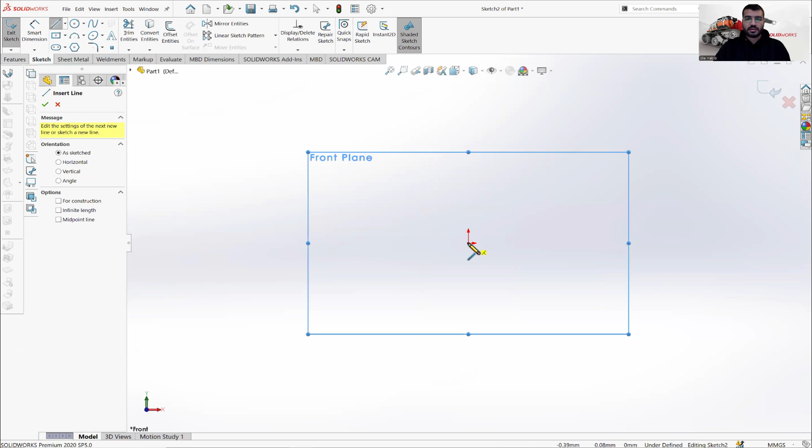So here, front plane normal to, another time normal to, then sketch, line. Let's start by drawing a random sketch, and after we will define it. Here we have an arc.

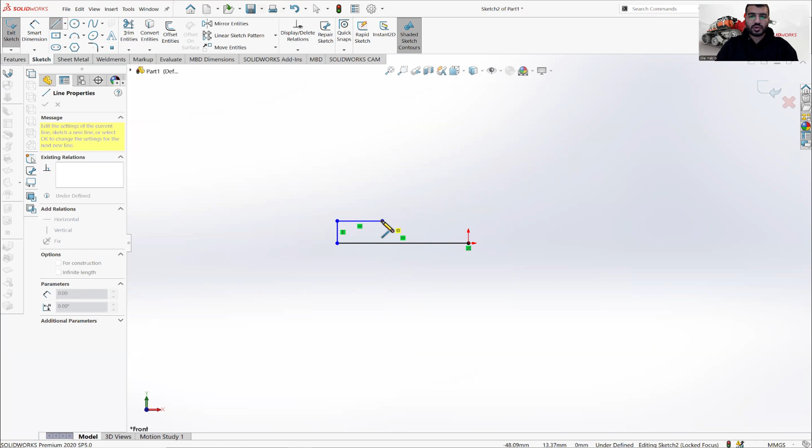What to do? Line another time, return it to the point. Then another line like this, vertical. Then we have right and bottom, horizontal and bottom here. Then horizontal. Then here we have a vertical line.

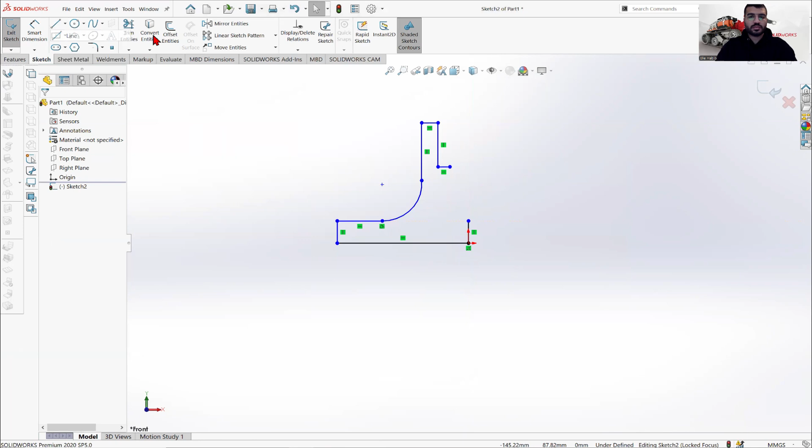After it, we have an arc here. What to do? Line another time. We have the arc there. So we have a full contour sketch. Now let's define it by putting the dimensions.

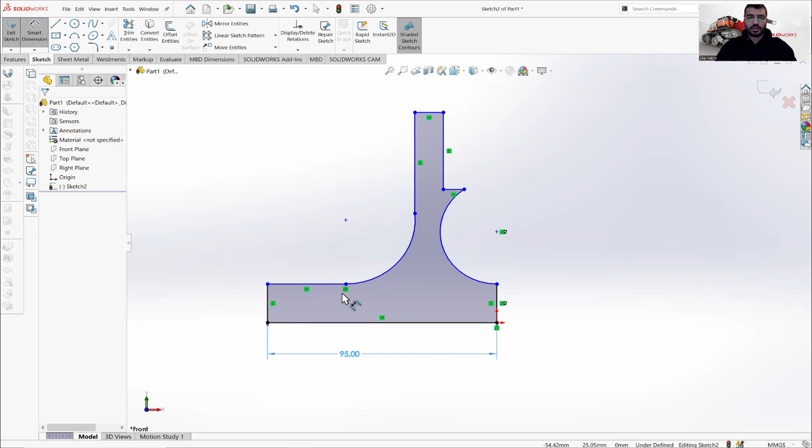We have here length of 95. We have here 15. And here these two lines control this line are equal. We have the total height is about 85 millimeter, as mentioned there, 85.

Here we have radius 30. Here also we have radius 30. Here we have 5 millimeter. Here is 5. And this line is 15 millimeter.

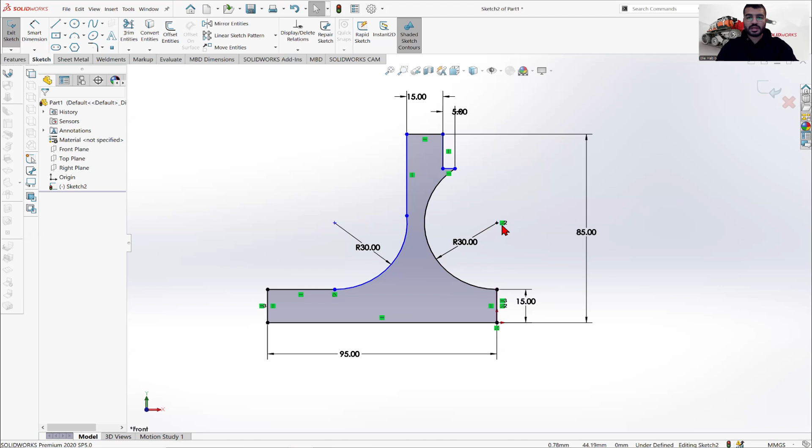So here, the center of the circle control this line coincident. So let's do an undo. Drag it. This line control the center are coincident. And here, this line control this arc tangent.

Perfect. Now let's extrude it. Or before we have this cut there. Let's draw a rectangle here. That we see here, the cut is about 3 by 15.

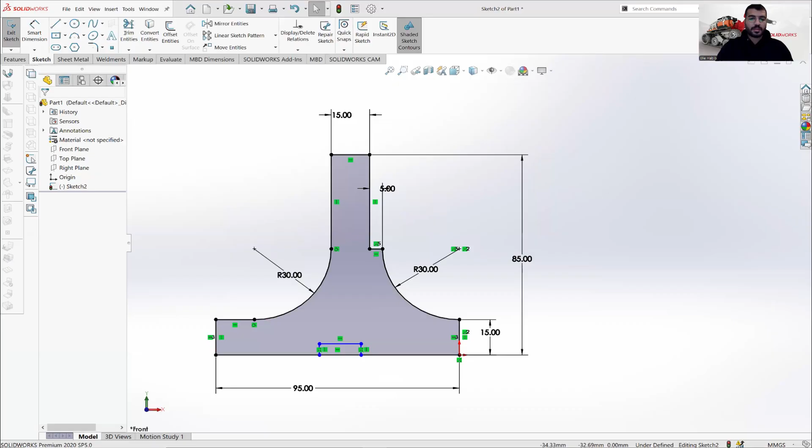Here, 15. Here, the length is 40 millimeter. This line to this line, it's 40. Yes, trim. Okay.

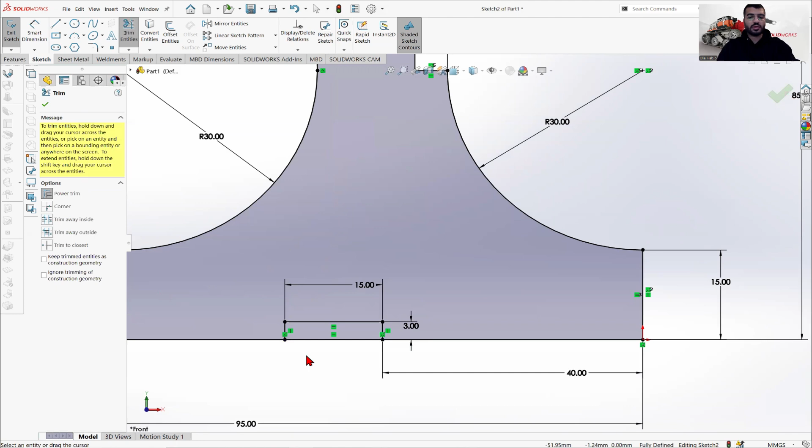Now we have this sketch fully defined as drawn there, also with all the dimensions. Now we should extrude it 40 millimeter. What to do? Feature, extrude. Type here 40 millimeter and click on yes.

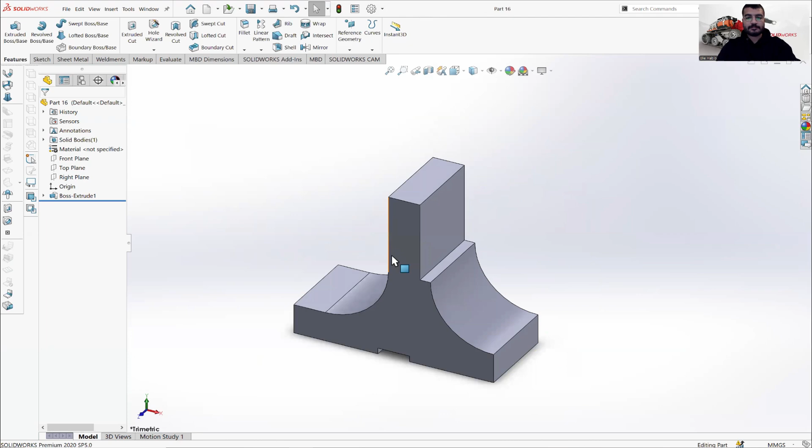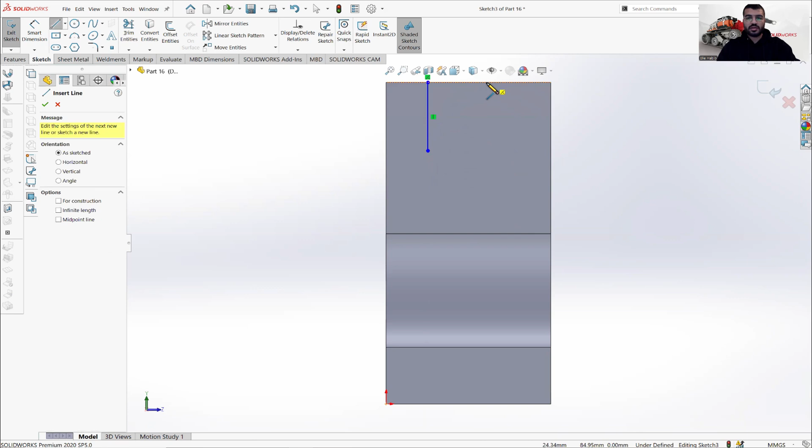Now let's do the cut there. Right click, normal to, sketch this line. We have a vertical line within an arc circle. So it's better to draw the other line also vertical. Then do the arc here.

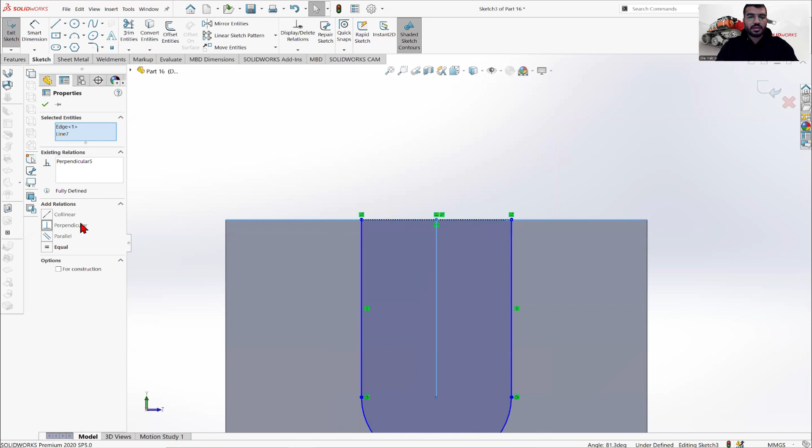Then draw the line there. The center here, to the center. This is the center, and make them vertical in order to make the sketch in the mid of the surface. So here, line, control this line, perpendicular, and it's just for construction. So mention it for construction. And now we have it in the middle.

We have a length here of 25 millimeter. Here we have a diameter of 10, radius 5. So here we have radius 5. Perfect. We have here it's 15 by 15.

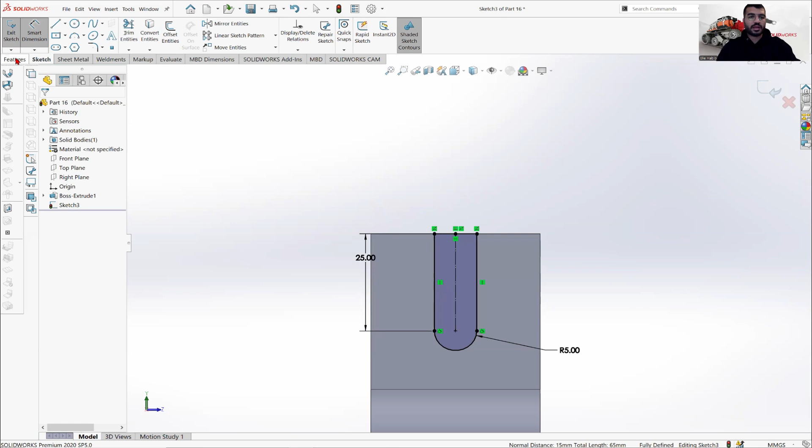We can check it if it's 15. Perfect. Here also it should be 15, because it's in the middle. And we can do the cut, feature extrude cut, and click on yes. Click on save.

Finally, we will draw this circle here. Half circle with these two tangent, with an extrude up to surface till this surface. And you should draw the sketch here on this surface there. And we have the dimensions here in the top view. This is the side view, this is the front view, and this is the section view.

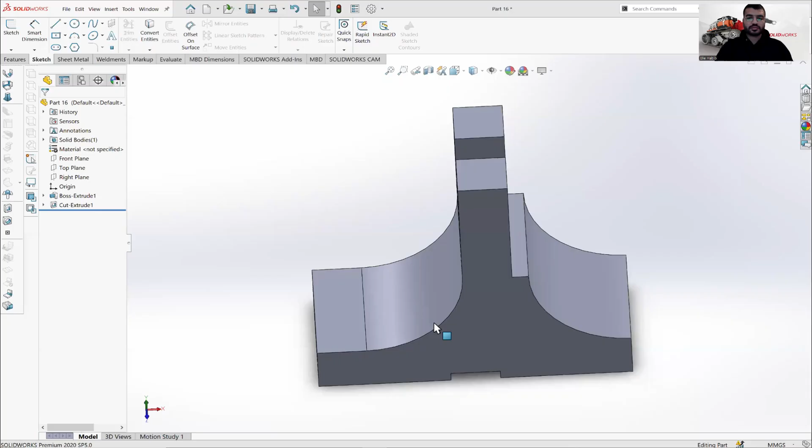And after finishing, we have here a hole of diameter 10 millimeter. We will cut it through all as mentioned there and as mentioned there. So first of all, let's draw with this sketch here. Normal to, perfect. Have now this view.

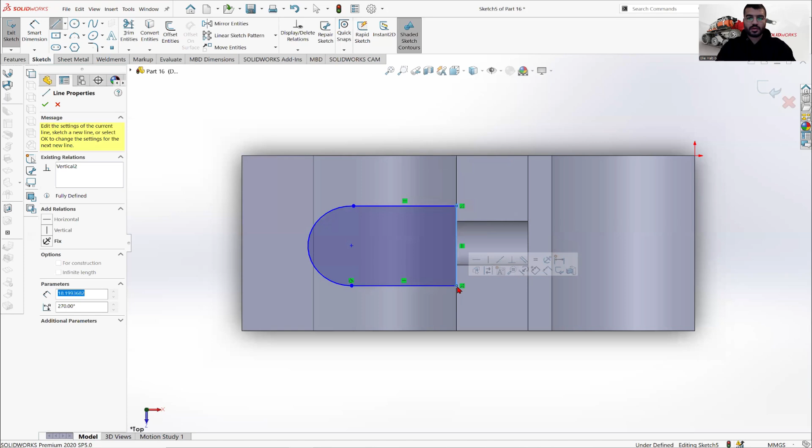Let's draw the first line. Half circle. Okay, it's in the middle. So here, midpoint, and here, perpendicular. Here for construction. Here we have 15.

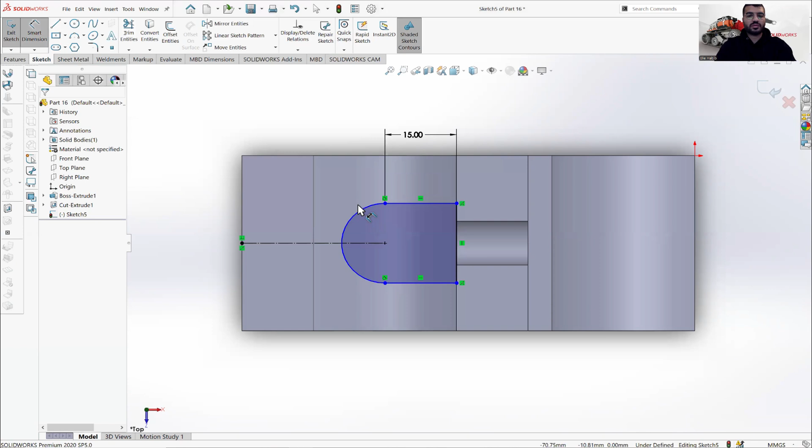Okay, so here we should do add relation, control this arc control this line, and add tangent. Perfect. And here we have 15. So here we have a diameter of 12.5 times 2 because it's radius 12.5. So radius 12.5.

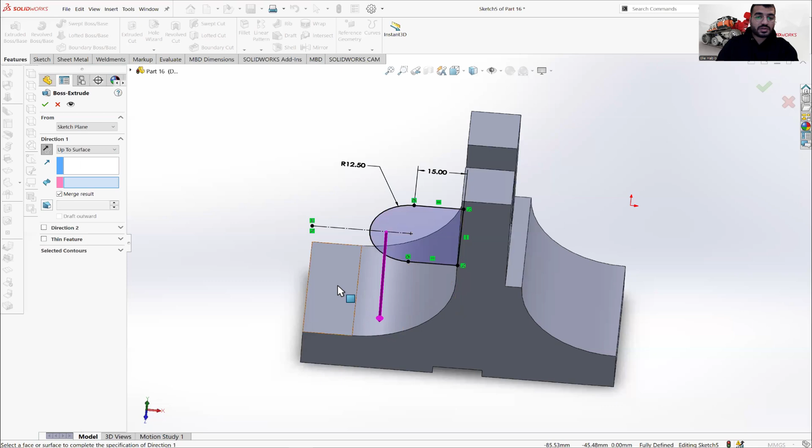Okay, and now we should do the extrude up to this surface there, change direction, and choose here up to surface, to this surface, click on yes. Click on save. Finally, we should do the cut here of diameter 10 millimeter in the center of the arc.

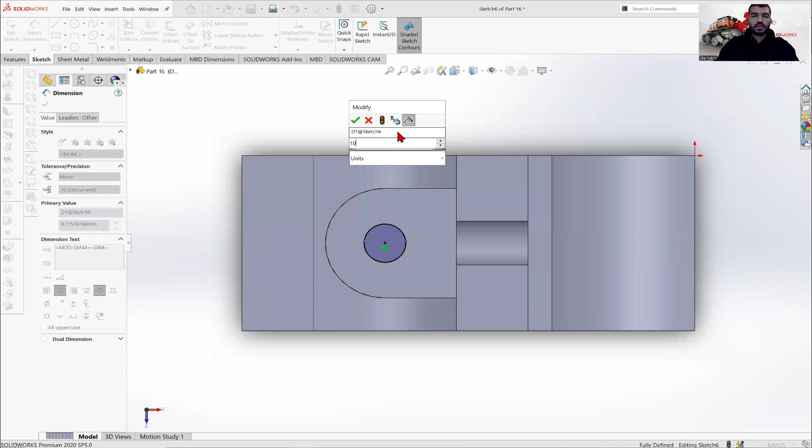Sketch. This is the center. Diameter 10. Click on yes, feature, extrude cut, and through all. We cut it all.

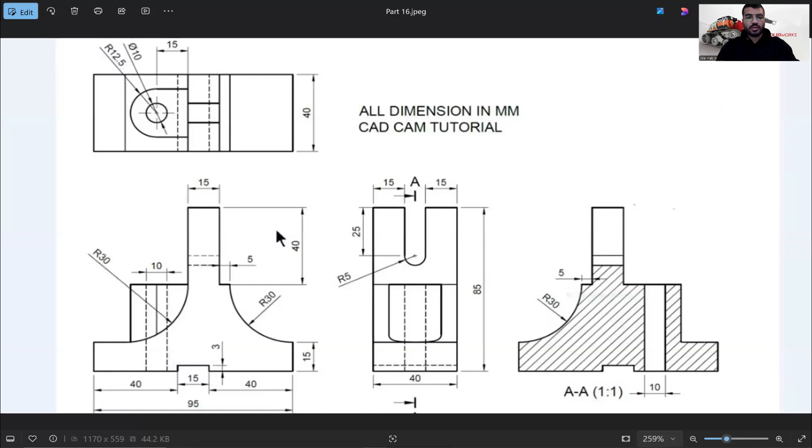See, it has cut it all. See if we have missed anything. Perfect. We have drawn everything here.

Last thing to do is to click on edit appearance there and choose a color. For example, this blue color. Click on yes, and then click on save.